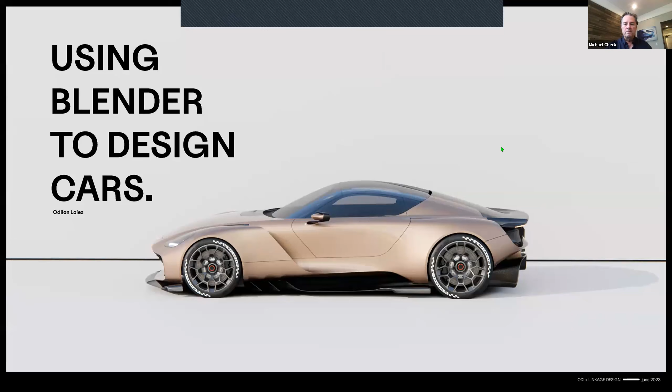Yes, good. Okay, so Mike briefly introduced me. My name is Odilon Loiez, that's the full pronunciation. Mike asked me to do a talk about Blender, and since I'm constantly talking about it to anyone I meet, I obviously said yes. I don't really know who I have in front of me, if you have experience or not with Blender.

If you never used it, I really hope this will convince you to start with it. If you're already a user, I hope you will learn things and be motivated to dive into more stuff with what Blender has to offer.

One thing I'm quite certain of is that we are all from the automotive design field, and that's why I did a fast car, because I know we all like that. The purpose is to have a nice demo model for the different features and workflows I want to show you. So yeah, there's a challenge here.

I expect most of you to be from the US, whether East Coast or West Coast, I guess it's around lunchtime, maybe just after or before. So I need to keep it interesting. I'm more than happy to answer any questions at the end of the presentation, that would be the best. But otherwise, just stop me.

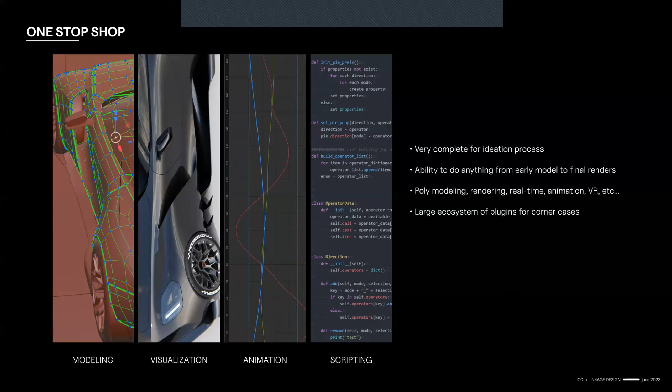The ecosystem is so vast that even for a niche field like ours, you can find people creating simple but really time-saving tools. There are a lot of good examples of how you can leverage Blender's abilities, but one I really like is Rashid Tagirov.

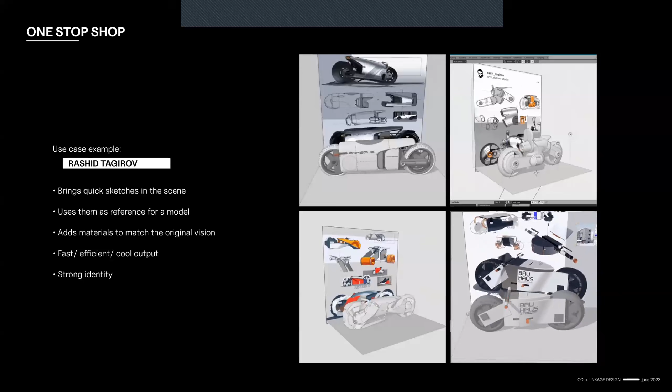He's a designer at Alfa Romeo, doing super nice work with Blender. His process is to bring a sketch, a very simple one with a strong intention, and then he models the vehicle directly in Blender. From there he also adds material and lighting, which really helps him set a strong mood and identity, which I find very cool. It's kind of the essence of what we're doing - what he does is in the end very close to his sketch and his intention. The process is easy, fast, efficient, and the output is just great.

He went even further on this project, where on top of modeling the thing, he also animated this cute little vehicle going up a mountain.

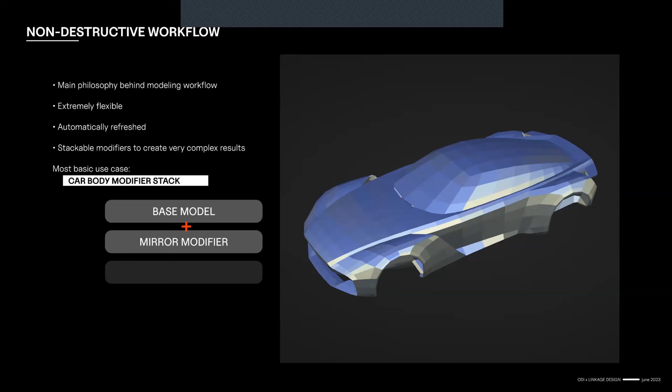So you would add a modifier that just does the mirror, and you can still control only one half of the car, and it will translate to the other side without you having to do anything. Same for smoothing with the subdivision modifier, which again doesn't change anything for you—you still have those big polygons that you change. Obviously most 3D software have a way to deal with symmetry and smoothing, but we will see that you can do much more and go much further with this stacking idea. These modifiers make the modeling extremely flexible and powerful, and you can really get complex output from simple input, which is what Blender is about for a lot of things.

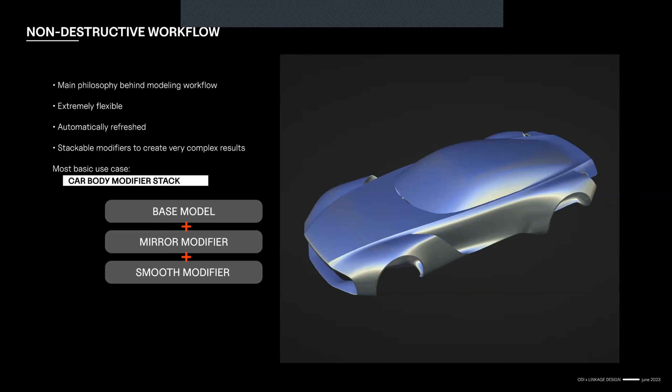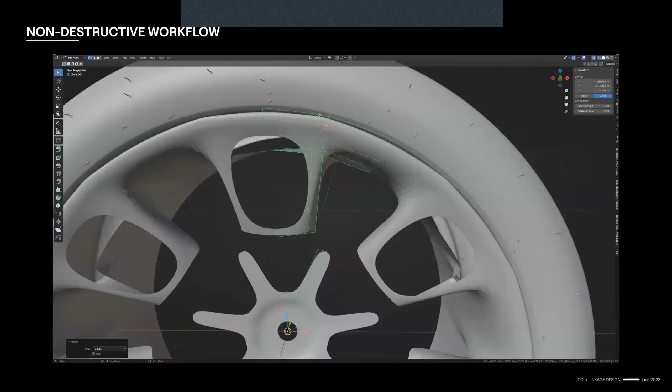Everything is automatically refreshed and tweakable with the settings in the modifier settings. A real life application is if you have to model something circular like a rim. In Alias, it's a pain to have to mirror the half spoke you're working on and then duplicate through another menu, and even worse, having to deal with instances if you're brave enough to use those. Here you can simply have a modifier taking care of mirroring the part of your rim, then duplicate it around the center of the wheel, and you're good to go.

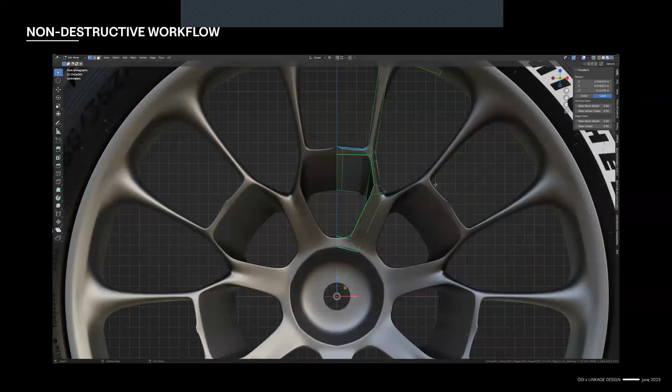Each modifier takes the previous one as an input, which means the order is very important, but it's also giving you more flexibility on the outputs you will get. In this example, I didn't have any idea of where I was going—there was no sketch, nothing. I just knew I wanted to make a 7-spoke rim and that it had to be Aston Martin-ish. Having this direct feedback made such a difference to evaluate the design and know if I was heading in the correct direction. I love Alias, but having to do that there would have been a very different experience.

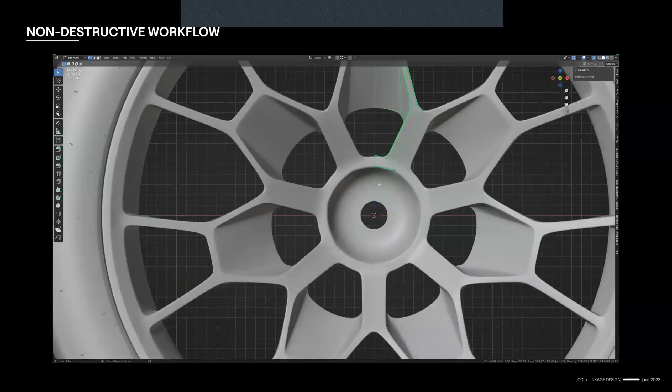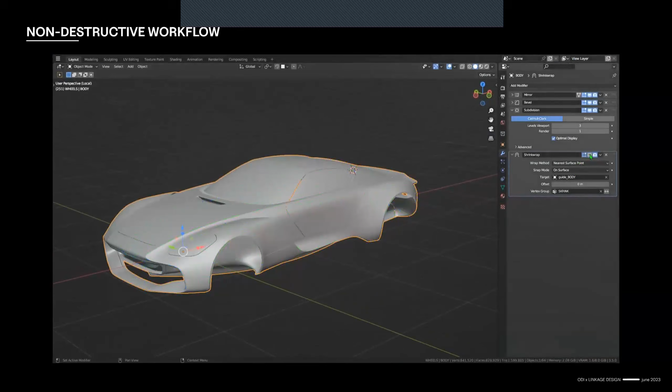That's if you want to iterate on something. But the good news is there's also tools to polish and make things look nice, and my favorite for that is the shrink wrap. This one takes one geometry and makes it match the shape of another geometry. So you can just duplicate your clean model of a car, add some subdivision to it, and shrink wrap it to the other one. Because if you just model your split lines and everything, you will have really poor reflections. But just by using the shrink wrap, as you will see here, you get very nice reflection—you don't lose the quality, but you still keep those details that you want to add.

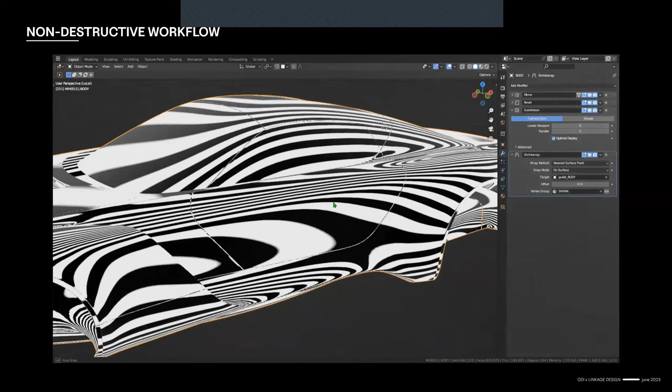You can get really clean results without having to care about the topology as much, at least for the model that you cut, since you anyway shrink wrap each of its vertices to the nice and clean one. And you have some nice little features that Blender has to enable that, like vertex weights, that let you control the influence of that modifier on each control point of the mesh. But we'll talk about that a bit later.

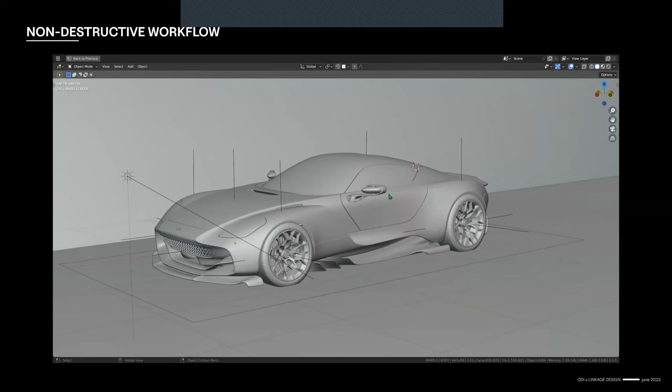That's very useful to just have something clean to show people, because these kinds of details bring a lot to the look of the car. But it's also very nice if you just want to add small details without compromising the main surfaces.

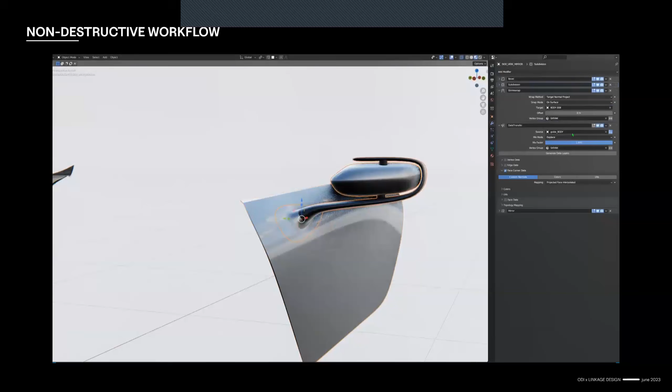The last modifier here is a data transfer, which is a fancy last touch, so that the normals of the body and the stem are matching, which removes some artifacts that you could have in the reflection. A note on the shrink wrap: as great as it is, the problem is that it doesn't allow you to export to Alias subD or any other subD-based workflow behind.

The reason being that the shrink wrap happens after the subdivision modifier. So it works with high poly data, which you really don't want to import into Alias subD, since this would create thousands of small surfaces.

For rendering purposes, though, you can totally export the high poly model directly to VRED, KeyShot, or Unreal Engine, any external render engine. But the question is, why would you even bother switching software for visualization, when you can have not one, but two amazing render engines within Blender by default?

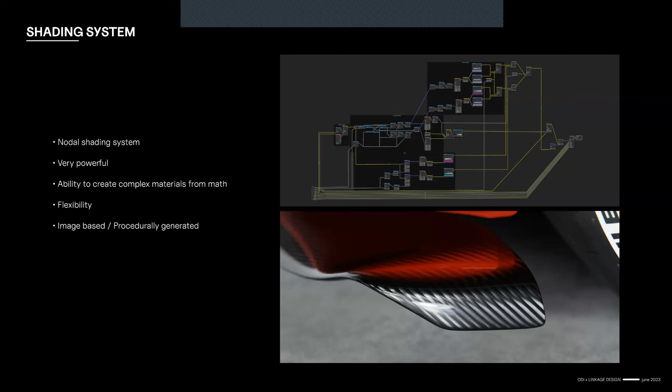If math isn't your thing, you can just bring in some images and work from that, and even apply modifications to the contrast, colors, value levels, anything. But personally I really like to do everything procedurally, just with math, because this leads to a lot of flexibility. Like here, you can see the carbon fiber I was showing previously — no images means you can get virtually infinite zoom.

But you can also define exactly the kind of control you want. On this material, for instance, you can change the pattern of the carbon — you can go with a 1x1, 2x2, 4x4 weaving of the fiber. You can also tweak stuff like the curvature of the carbon. The goal was to mimic what Koenigsegg does, where they sand the panel until you reach the fiber — they call that naked carbon.

So I wanted to get this effect, and in the end you can also go the other direction and just have much more curved fiber. And obviously you can play with the clear coat and this kind of stuff.

Making this kind of material is basically a process of understanding what light does when it encounters that material in real life, and just trying to do the same, thanks to the amazing progress we have in computer graphics.

If you're more of a visual person and don't like math, you may like another feature that's very underrated in my opinion — the Compositor, a post-production engine you can automate thanks to nodes again. This one's more of a quirky one. I mainly mention it because I think it's underrated and I like it a lot, but also because the latest version, Blender 3.5, now offers it on the GPU, which is a big deal because it means you can have all these effects in real time in the viewport.

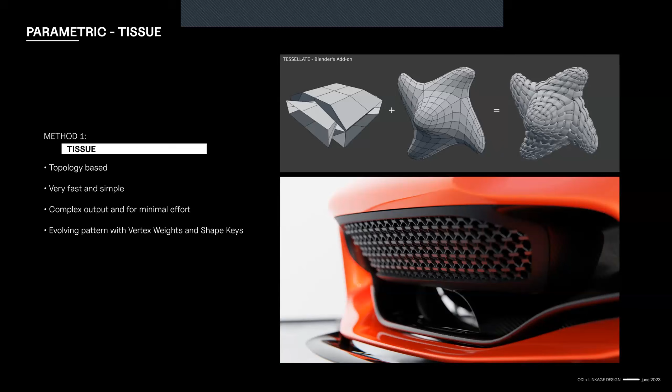And once again, you can get very complex outputs for minimum effort. It also supports those shape keys and vertex weight that we talked quickly about, and that we will see later. But here is an example of how it works.

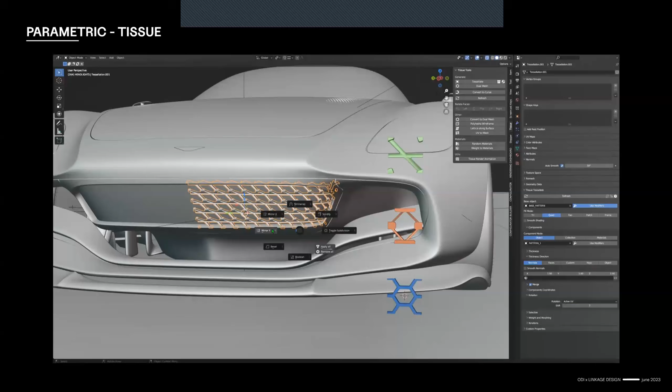So you can just pick the pattern that you want, pick the destination, and then you get a tessellation with your pattern. You can tweak the rotation so that it's correct. And then if you just add a mirror modifier, you have your full mesh, and this was no effort at all. You can easily just change for another component, as they call them, which is the pattern itself. And even if you modify this one afterwards, you can just refresh and get something quite cool and quite complex with, again, no effort, which I think is super nice for iteration, at least.

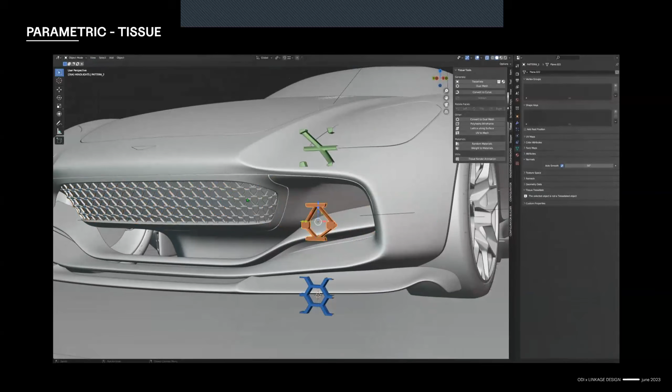Obviously, if you want to go further, you would need all the tools like Grasshopper probably. And yeah, here's the same thing with a hexagonal pattern, which sounds more boring, but it's hiding a feature that we are going to see right now, which is those shape keys and vertex weights.

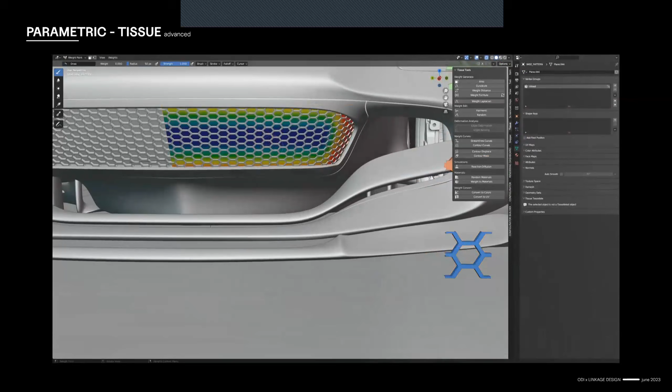So shape keys are one variation of where you put your control points. You can have many of them, and you can just have a slider to switch between them. And vertex weight is assigning a value to each vertex, and this will be the weight. The cool thing here is that you can combine both, the weight and the shape keys. In that sense, you can then just control your shape key thanks to your vertex weight, which, again, for the amount of work it is to get there, maybe the result is not perfect, but it's still very, very cool, I think, to have that so simply.

Second method is a bit more traditional. It's called geometry nodes. Again, nodes. Basically, Blender is doing this thing they call everything nodes, where they try to make as many systems as they can with nodes to let you do more complex stuff, and also kind of automate it. Like, you can just change the input and you get the same thing that you wanted to do, but on that new input. This one is much closer to what you would find with Grasshopper.

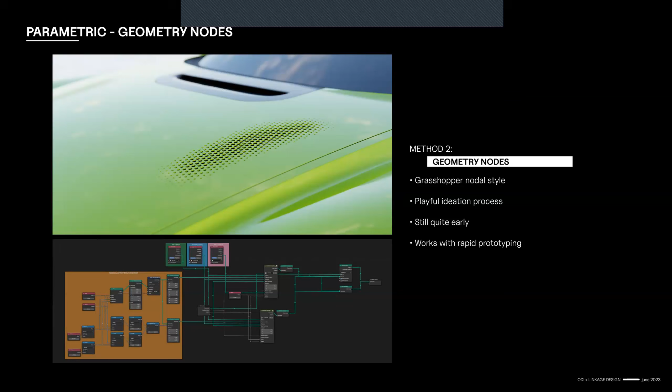You have those mathematical actions that you're doing on your inputs. You can connect those actions, grab properties from here and there, and just get to the desired result. It's quite playful because you can define which input you have, and then just tweak from the menus and have a funny output. Like I have a client, for instance, where I did the geometry node tree and then gave it to them, and they could just tweak the settings and get what they wanted specifically without having to come back to me. I just move a slider and send it back to them, which is pretty nice.

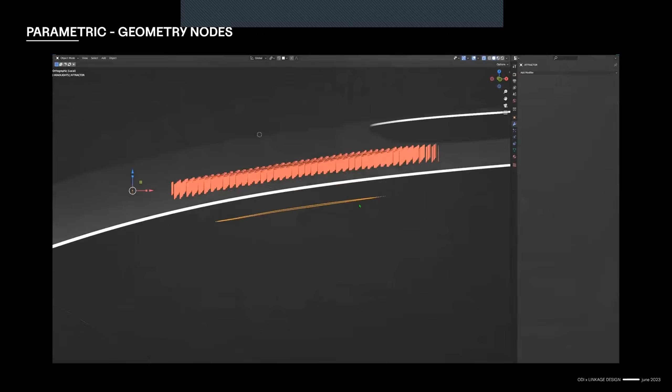You can see it here in action. I don't have the Boolean operation applied here because it's a very performance intensive action. So you just have those hexagons going through the front hood. But yeah, you can see that there's this pattern that repeats and that we can rotate, and we also have this attractor. The distance between that object and the pattern will control the size of the pattern and also how it fades on the sides.

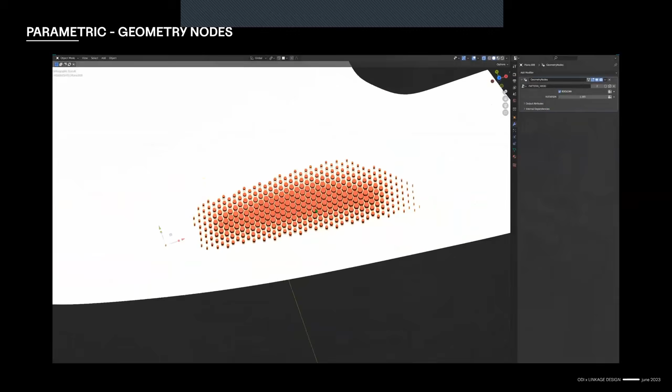This technique is really nice, but I think it's still quite early, and hopefully one day you will get much more control over the mesh itself and do proper procedural modeling, because right now it's more about placing stuff, and yeah, I think it's a bit limited, but it has a very, very bright future because Blender is putting a lot of effort into these nodal systems, and geometry nodes is quite recent. So let's see what it brings in the future.

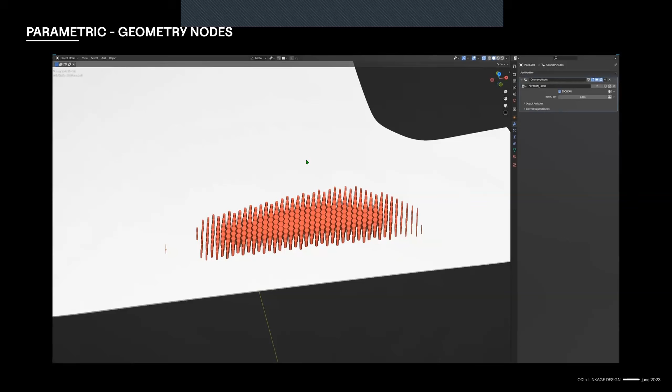Another thing that Blender tried to push is doing some kind of smaller apps based on Blender. And for me, the perfect thing to use that would be to do a configurator. So that's what I'm developing these days.

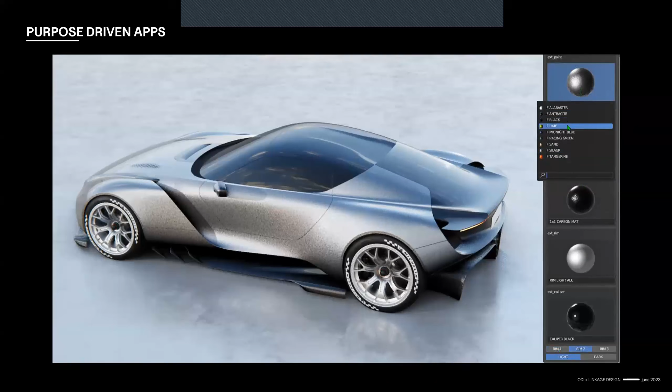The idea is that you could leverage some of Blender's features for specific applications like 3D printing, file conversion and everything. For us in automotive, this is the perfect way to create a really nice configurator for reviews, or something where you can have different variants of environment, rims, and colors.

I think it's quite interesting, and it's still early as well. I'm still developing it—this is just a preview, but it has a lot of potential, and I'm excited to finish it hopefully soon.

The third thing that will make Blender future-proof is the community, because it's already huge, but it's very welcoming. You can find tons of tutorials, tons of add-ons, and this community is really pushing the boundaries of what you can do with Blender on a daily basis.

If you want proof of that, you can check the Blender Conference, which happens every year in Amsterdam, where you can watch people presenting real use cases of Blender and how they develop their workflow thanks to it. It's very inspiring—you have people from Marvel explaining how they did some titles with it.

And then there was a guy from Kiska. Kiska actually did two different presentations, one about the design process for motorbikes with Blender, and another about the visualization and how they do all the press renderings with Blender for KTM.

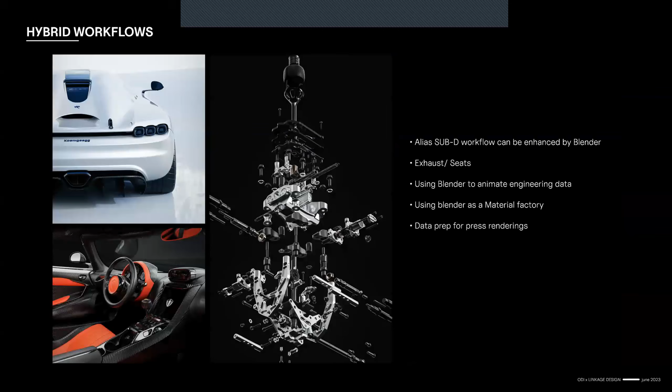So, time to wrap up. I just have two slides before we get to the questions. The first thing I want to say didn't really fit in the other categories, but I want to talk quickly about hybrid workflows and examples of how we use Blender at Koenigsegg.

One of the main examples was using Blender in parallel with Alias sub-D. We used that for parts where the flow is critical, like exhaust, seats. The modeler who did that felt more comfortable doing those parts in Alias, but we could have also modeled it in Blender because it's still sub-D in the end.

Another use case was the animation for the shifter mechanism. We had to take the CAD data from engineering and meshed it in Blender. We assigned all the materials, then brought them into Keyshot, because the process there was mainly on Keyshot. We also did all the animation of each single screw and any part you can imagine, so we could do a dynamic exploded view.

It was very, very cool to do that. And finally, the interior render you can see down there—we also used Blender for the data preparation for the seats. The pads were done in Blender, and then I did all of the UV mapping and everything so we could have nice textures for the press renderings.

So we're looking at your screen right now - it looks like you have a small window in front. Oh sorry, yeah, that's the chat. Cool, okay, now we see it. So you can make modifications in the real-time mode - that's great.

There was so much covered here - is any of this available on YouTube or other forums? For this specific presentation, or Blender workflows in general and tutorials? Because I think you're recording it. With Blender, as you said, it's a pretty vast community, so I'd expect there's a lot of content out there. It's a bit trickier for what we do specifically because we care about things other industries don't really care about.